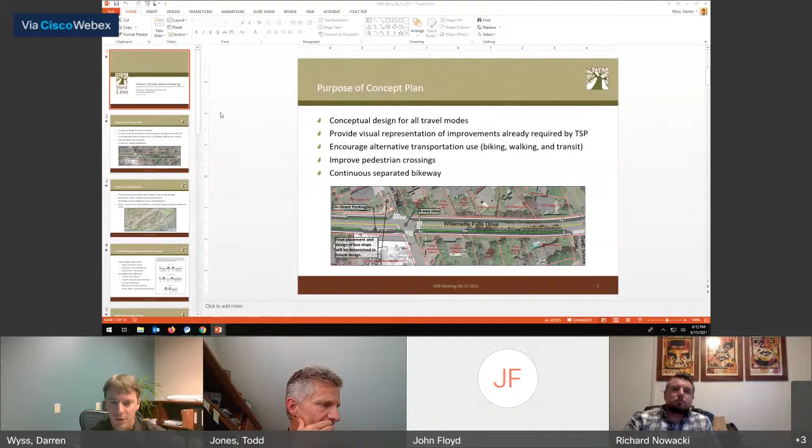Improvements through redevelopment have always been required through the transportation system plan, so if someone were to redevelop a property, the city would require these improvements. But it was always very tenuous exactly what the improvements would look like, because there wasn't a solid plan based on all those different factors and areas. This really provides a good visual representation of what the improvements would be, so when someone comes in for redevelopment, it's known what it's going to look like. It's trying to encourage alternative transportation use along this heavily traveled corridor, encouraging biking, walking, and transit use. It's also meant to improve crossings across the street itself and across side streets, as shown in the visual of improved crossings at Osman Road. The goal is to provide a continuous separated bikeway, with no on-street bike lanes — all separated from the travel lanes.

So hopefully 20 years from now, you'll be able to ride a bike from Fields Bridge all the way to Lake Oswego, between the improvements on Willamette Falls Drive and the proposed improvements on Highway 43. I don't know if any of you have ever had the opportunity to ride a bike on Willamette Falls Drive right now - it's not fun. So this is a plan that I think will be well received by the community, to be able to use this corridor safely and efficiently.

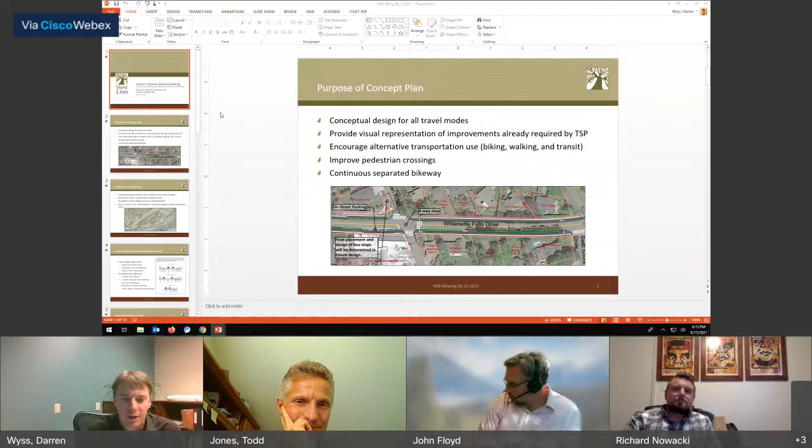Hey Darren, this is Todd. Do you want us to hold questions to the end or ask them as we go? Feel free to fire them off as you wish.

So if you got one, Mr. Vice Chair, are you okay with me asking a question? Oh yeah, please. Thank you for asking, but yeah, please go ahead.

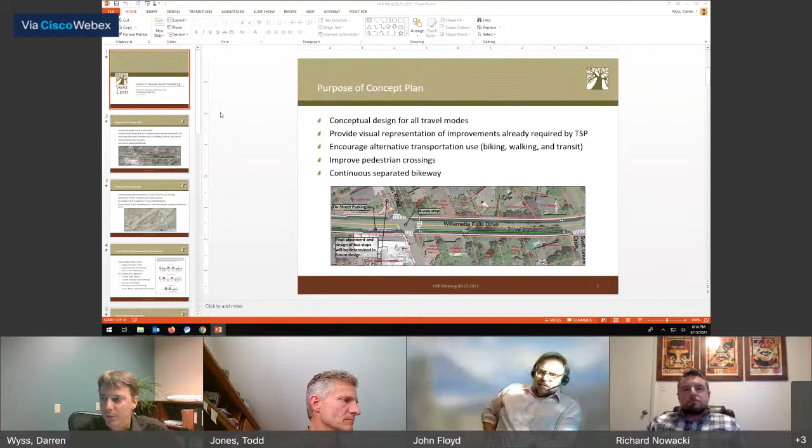Hey Darren, just to clarify, this plan stretches from the bridge across the Tualatin at Fields Bridge Park to West Bridge Park under I-205. Is that the extent of the plan, that length? That is correct. So the Highway 43 concept plan, which was adopted in 2016, basically goes from Lake Oswego city limits down to 205, and this plan goes from the Tualatin River to 205 to connect them together. I should mention that this plan will be adopted the same way the Highway 43 concept plan was - it's just an appendix to the city's West Linn transportation system plan, another document attached to the transportation system plan.

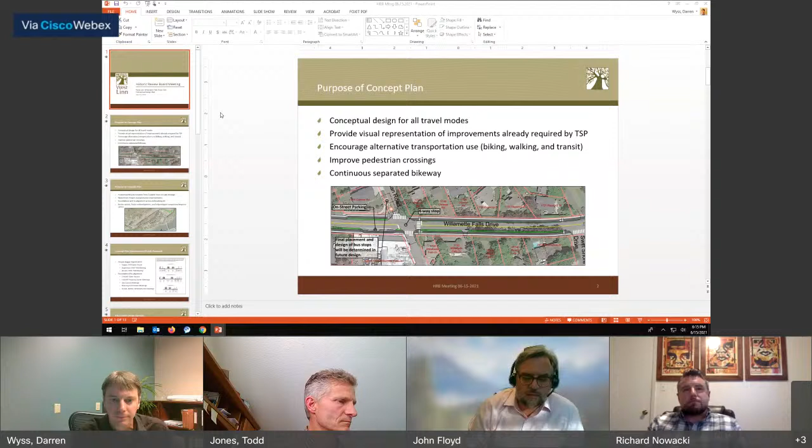So I'm sort of repeating myself here, but again, the goal is to have a complete pedestrian and bicycle network from the Tualatin River to Lake Oswego, so someone could travel the entire distance without being in the travel lane.

So during the course of the waterfront project, we discovered a 1988 plan that was done for this area. The recommendation out of that 1988 plan was to reroute the street through the mill parking lot. We explored that, and it came out as a viable option.

So you would again go through the roundabout, and then to head west toward Willamette, you would go through a new street that goes through the mill property, and then on your way to Willamette.

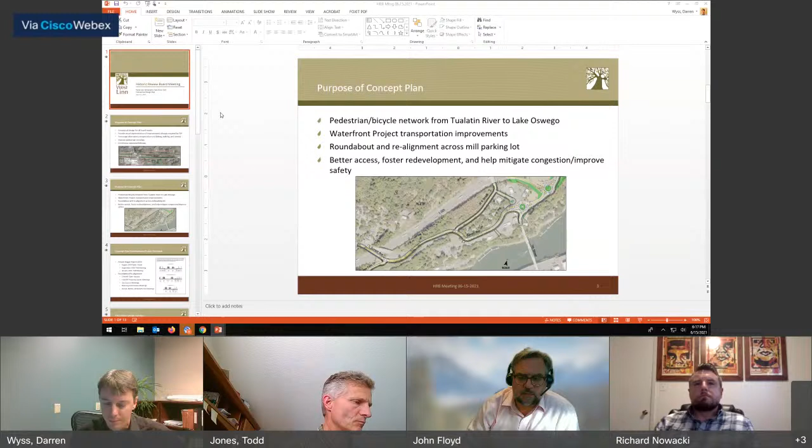Just a little background: the project began in March 2019. There was an open house in August 2019 that was really focused on the cross section of what the bike facilities and pedestrian facilities would look like. The Transportation Advisory Board was the advisory board for this project - they met in September 2020 and then again in January of this year to make final comment on it.

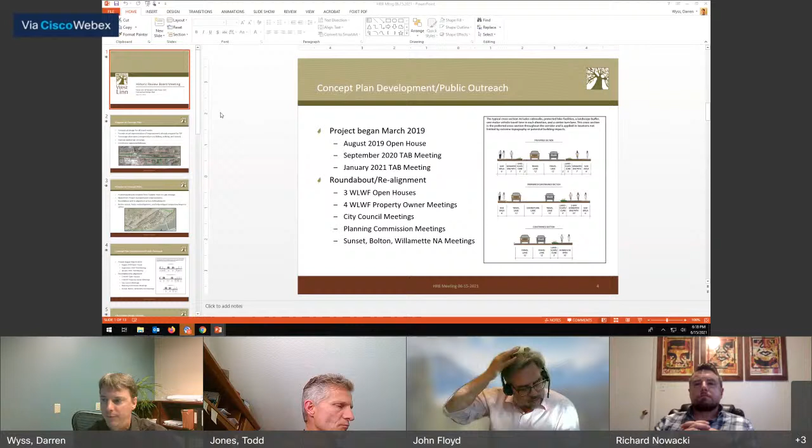As I said, the roundabout realignment was really born out of the West Linn waterfront project. There were three different open houses back in 2017, '18, and '19 where this was discussed. It started out with seven options, was narrowed down to four, and then got narrowed down to this final preferred option. We worked with the West Linn waterfront property owners, all the owners around the mill parking lot area, and held four different meetings with them to get feedback. City Council held a couple of meetings discussing this realignment, the Planning Commission has held a couple of meetings surrounding the realignment, and we also met with each of the Sunset, Bolton, and Willamette neighborhood associations regarding the realignment.

Since the corridor is so varied along the way, we really want flexibility in the design. One thing is we want to utilize the existing right of way and work with the terrain and slopes. This is considered a 30% engineered design, using topographic surveys and what we know about right of way widths, trying to design it to fit within the right of way and avoid impacting adjacent properties. Also, the city wants to be good stewards of public funds, using money to build infrastructure as opposed to buying pieces of right of way off adjacent properties.

As you can see in these two images, the green planter strip that separates the bike facility from the street is removed in that section in order to work with the slopes, so you don't impact people's properties by having to build retaining walls that would require some of their property. So it's that flexibility to moderate the design.

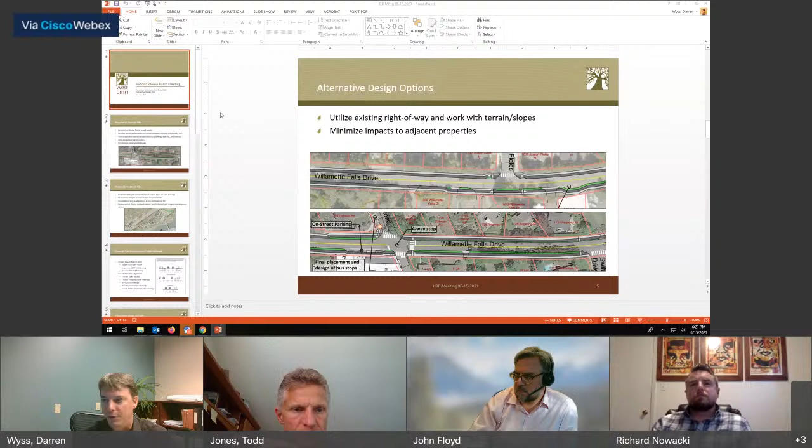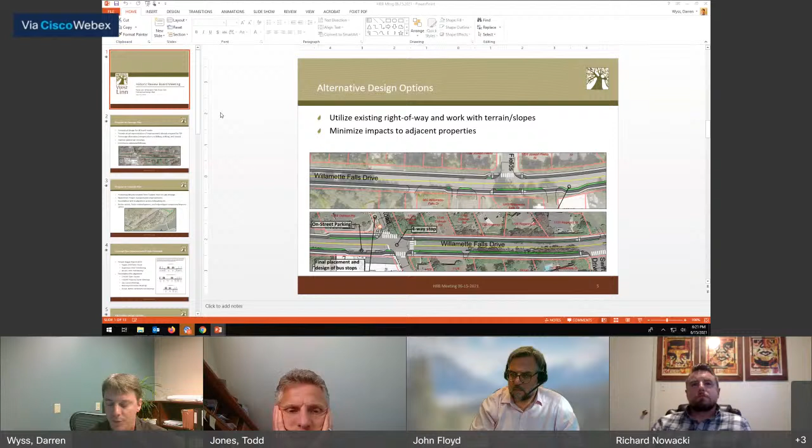On the right side of Osman, there's the full width of the planter strip on the south side of the road, but on the north side it's been shrunk a little bit just so we can fit the street cross section into the existing right of way. Once a portion of the project is funded, during final design the details would come out, and we'd work with adjacent property owners to make sure access to the property is still appropriate, dealing with any slope issues. If we did need any of their property, we would go through that negotiation process with them.

Here's another part of the plan that I think is important to point out. West of the downtown Willamette area, from Fields Bridge to the Willamette Commercial District, there would be bike and ped facilities on both sides of the street, so whether you're going west or east, you'd have bike and ped facilities on your side. Once you get through downtown Willamette, where improvements have already been made, you would be put onto what we call the frontage road.

There's a portion of Willamette Falls Drive that's separated, and the homes take access from this frontage road, so bikes and peds would be routed onto there. Once you got to the end, there's an existing pathway on the north side of the street which would still exist, with improvements made to it, and everyone would be routed to the south side onto a shared pathway.

So both bikes and peds would utilize this two-way shared path on the south side of Willamette Falls Drive, due to the constraints along the corridor there. There are cliffs that fall off toward the river, and extreme steep slopes going up to I-205 in areas, so in order to have the least amount of impact, not only on adjacent properties but also on construction cost.

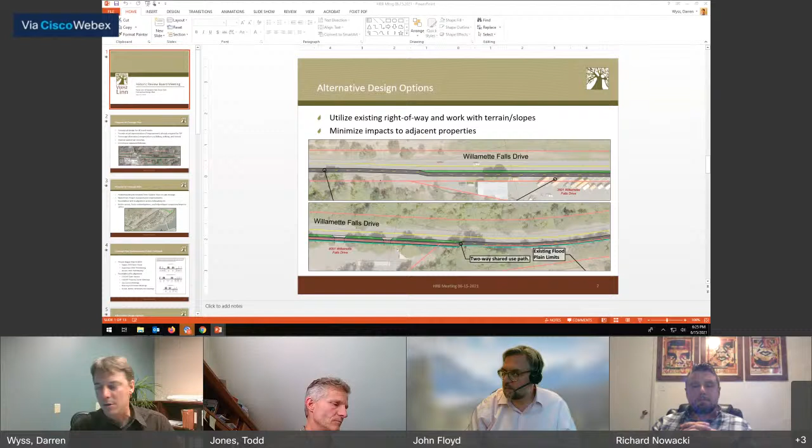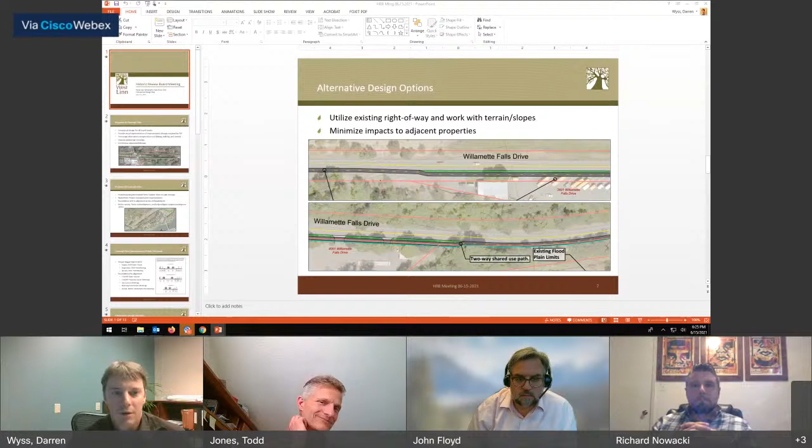So again, the shared path will be on the south side, going along the undeveloped stretch where you'll only see the old bus barn and the old composting facility. Then once it gets down towards the mill area and the PGE facilities, it will actually utilize Chestnut Street. Chestnut Street exists and comes up to the Sunset Bridge.

We utilize Chestnut Street to connect into Sunset, where there'll be a stop. Then from Sunset, it'll travel along the current Willamette Falls Drive corridor for a bit, and then drop down. There's a parking area that the mill utilized that was adjacent to Willamette Falls Drive. It will drop down through that parking area into the main parking area of the former mill owners, then go along the down slope from the existing homes that front Willamette Falls Drive, and into the roundabout. So there will also be an intersection.

So the old Willamette Falls Drive that goes across in front of those homes, we would probably rename as West A, and have it continue up past the high school. So there'd be an intersection there also.

Some of the reasoning behind utilizing Chestnut to a stop at Sunset is trying to meter traffic. When 205 backs up, a lot of people get off and use Willamette Falls Drive as what we call the third lane. So by creating stops along the way to meter out traffic, the intent is to make it just that much slower, so people don't get on their traffic app and see it's 2 minutes quicker to get off at Stafford and weave through versus just staying on 205 and getting through town.

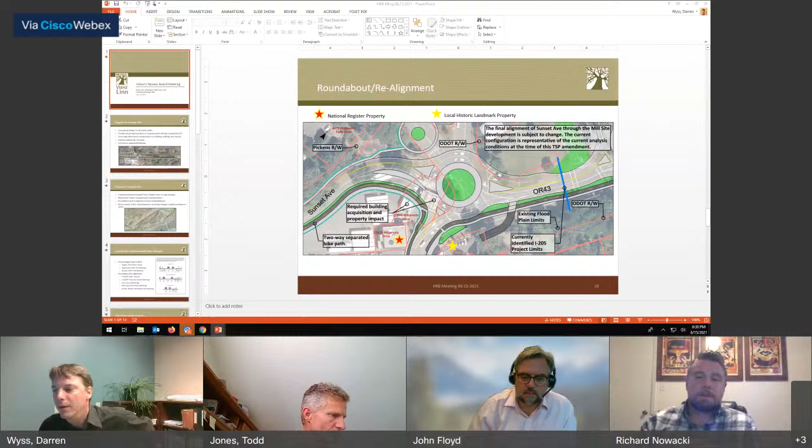That's exciting. I'm sorry, Rich, I was just commenting. That's exciting, especially the locks. There's been some comment about reopening the locks recently among various groups, and I think it's probably going to happen, which is just more opportunity for us as a community.

Yeah, so we worked with the consultant who gave the HRB a presentation a couple meetings ago about listing the historic City Hall on the National Register, and she did not believe this roundabout realignment would have any impact on the historic structure itself. So that was good news for us to hear.

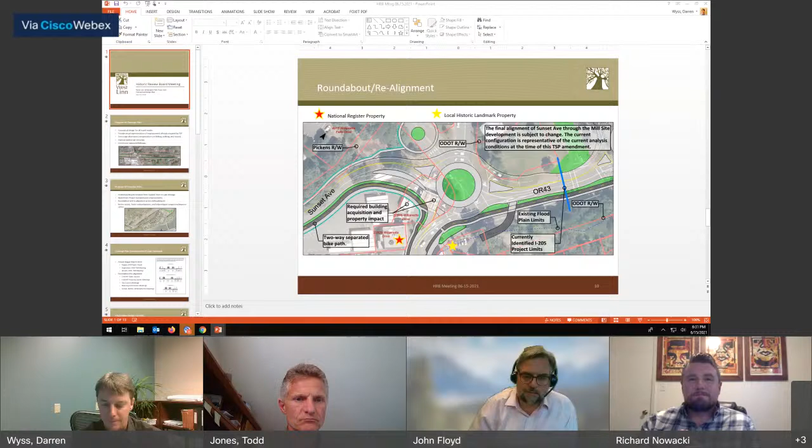So these are some other tidbits of information. The state has what's known as a Measure 56 notice. Any potentially impacted property owner, we're required to send a notice saying that we're undertaking a project that may affect the zoning or value of the property. Any property identified as potentially having an impact was sent a notice, and we additionally sent a notice to all corner property owners along the way to make sure word was getting out. We also sent a postcard to all adjacent property owners from Fields Bridge to 205, so everyone was noticed that this project was going through the adoption phase. As required by our code, it was also placed in the West Linn Tidings as a public hearing notice.

So the schedule to adopt it: the actual public hearing with the planning commission is tomorrow night. The planning commission's role is to review it and make a recommendation to city council. They held two work sessions back in April and May, so they've seen it a few times now. June 24th, the Transportation Advisory Board will hold another meeting for a final review and pass along their comments to city council. We'll have a work session with city council July 6th, and then July 12th there'll be a public hearing with city council. City council is the final decision maker on any legislative process like this, where we're adopting something into our comprehensive plan.

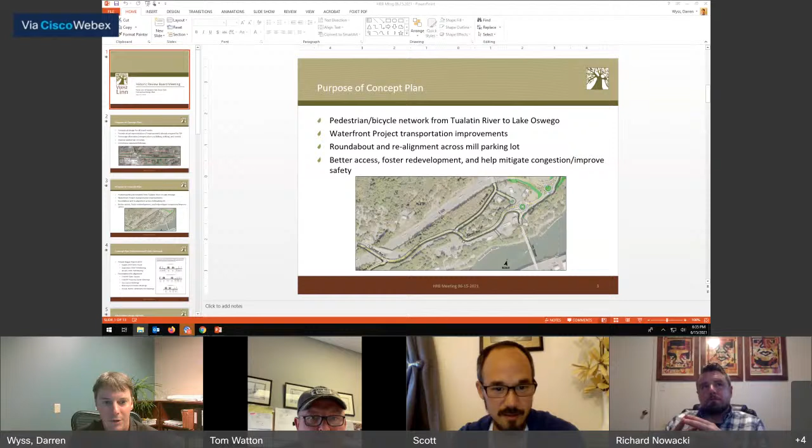Yeah, so here it is. Actually there's 3. Oh, that's right. I'm not sure if you can zoom in there at all. I don't think I can. I can open up the concept plan if you'd like me to real quick, or zoom in on your screen. You go to your zoom, you're at 100%, go to like 150 maybe so you can get a better look. Darren, that's figure 20A, if you're on page 38, you have to go there.

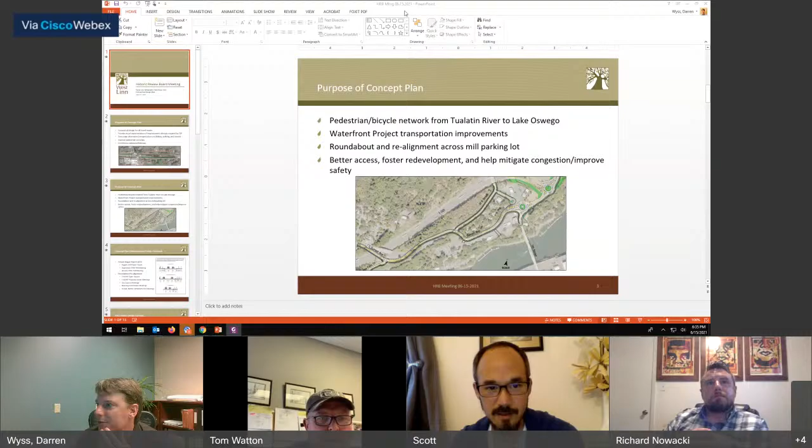All right, I'm going to stop sharing my screen and share another screen real quick here. Bear with me, I'll get there. It's worth it.

So who's the agent, who's in the bottom here as agent? Who's that? It's me, John Steele. Okay, good to hear from you, John. Luckily, I was explaining what I had to do tomorrow at 6 o'clock, and I suddenly go, 'Oh, I need to be somewhere else at 6 today.' Better late than never, yeah, I was interested in this one too.

So I apologize, give us a second, I'll share my screen again here. All right, can everybody see that now? Yeah, all right. Yeah, so this is, I guess... again, unfortunately it's not all on one sheet, so we'll have to switch to the sheets here.

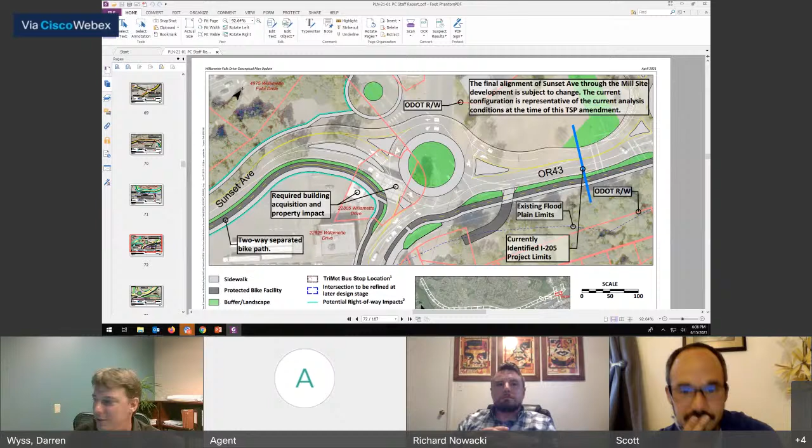This is the roundabout that would be the city's responsibility to fund and build. It's the one that, when you first come off the bridge, would essentially be located where the existing gas station is, and it would create a three-legged roundabout: one leg going west to Willamette, one going east to get on 205 or toward Lake Oswego, and then south to Oregon City across the Arch Bridge. That north leg here would not get connected to this little roundabout, just because of the slope issue.

And then the adjacent roundabout is this one here, which is part of the ODOT I-205 widening project. ODOT will reconfigure this intersection where the traffic signal currently is. When you're going north and get off at this exit, you come down to that traffic signal. They will eliminate this on-ramp, if you can see my cursor here. So when you come across the Arch Bridge, you can just get right on. That will get eliminated. You'll go through the roundabout and get on with the traffic coming from southbound 43 onto northbound 205.

So ODOT designed that, which then sort of pushed the city's hand, because we were looking at a potential traffic light here, which would have enabled us to continue this north leg and have a four-way intersection. But with the roundabout at this location, a traffic light could not be placed that close because it would back up traffic through the roundabout. There was also concern about traffic in the morning backing up across the Arch Bridge into downtown Lake Oswego or downtown Oregon City. So there are a couple of reasons why ODOT was not going to allow a traffic signal there.

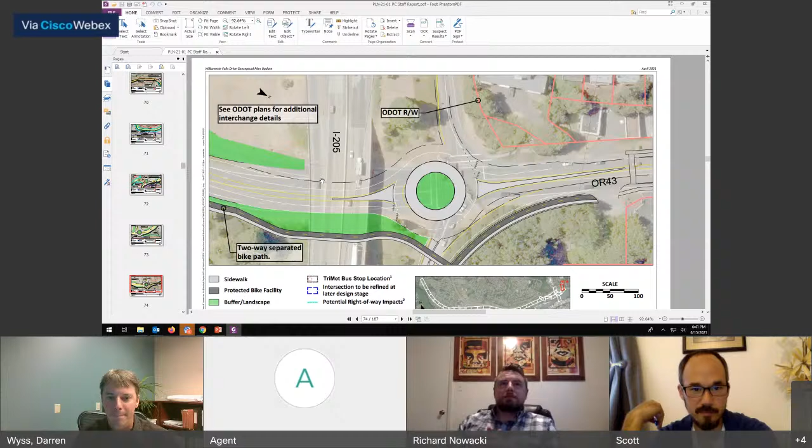We need to ease congestion, you know. Ultimately, I think that's what it comes down to. Yeah, and again, that is the ultimate goal of this roundabout here.

Especially with the growth, we're going to see a lot of positivity in this area in the next few years with everything with Grand Ronde and Blue Heron. And then what we're doing as well, coordinating, it's going to be really positive.

Yeah, so city engineer Lance Calvert talks a lot about the three-pronged approach to trying to mitigate some congestion in this area. Prong one being I-205 getting widened, so hopefully that will take some pressure off. Prong two, this roundabout, hopefully getting some free flow of traffic through there and not having that backup of people trying to make those left turns that are not protected. And three, as I talked about earlier, creating a couple of stops along the way on Willamette Falls Drive to discourage people getting off of 205 and using that to just avoid congestion on 205.

Has there been any talk about the toll situation on any of this? The toll bridge? So this has really been focused on the whole plan itself, on the pedestrian and bicycle improvements along the way. And then of course this particular solution was born out of the waterfront, so we haven't really dug too deeply into impacts on the tolling impact on the specifics of the roundabout here. But yeah, it's definitely something that needs to be part of the conversation.

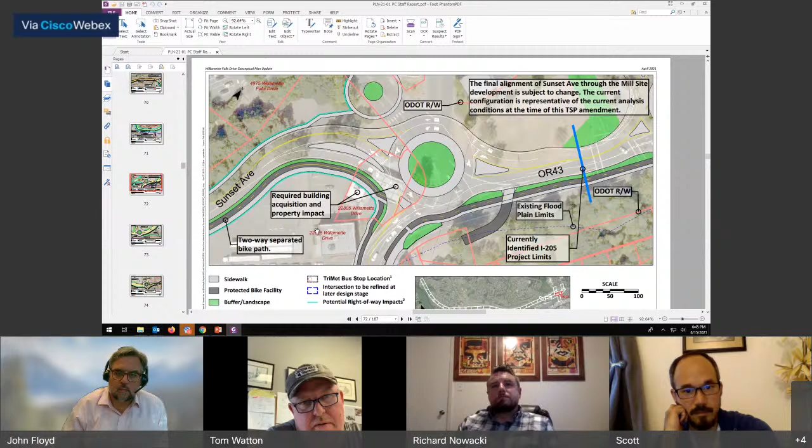So the intent, the three-pronged approach - I guess I need to take a couple steps back and talk about the sequencing of some of this stuff. First, we don't have identified funding to implement this plan right now. It's one of those things where you put together a plan like this, get it adopted into your transportation system plan, and then it becomes available for funding sources at the federal, state, and regional levels.

So our hope and first step would be to get this adopted, make it available for some funding, get it in front of them. Secondly, the I-205 project is looking more and more like it's going to get funded, and they're looking at possibly starting construction in 2022. I think they're calling it phase 1A, which would essentially be the Abernathy Bridge - they're going to split it apart, add new lanes, and build new pillars.

Then do this roundabout and the new on and off ramps, which we're thinking would take minimum 5 years, but more like 5 to 8 years. So the city, even if we were to secure funding, would not start the process of this roundabout until ODOT's roundabout would be finished. That would sort of be the sequencing.

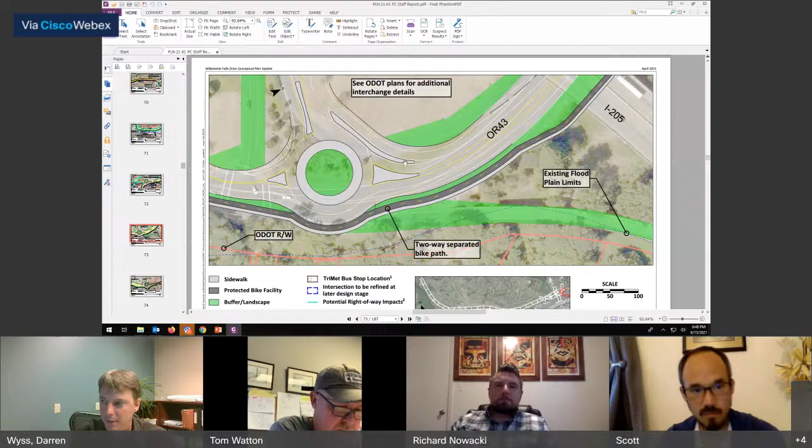Secondly, for people that do get off, eliminating this bottleneck at this intersection, creating more of a free flow through. You're all familiar with roundabouts, so it's a lot easier to merge your way into a roundabout than it is to be at a complete stop with traffic both ways, trying to make that left turn across without getting into an accident.

So that'd be the second prong, and then the third prong being the stops along the way. I believe there's a stop at Ostman that meters traffic going into the Willamette area. At some point there's probably going to be a traffic light at 10th and Willamette, so that would be another meter, or a roundabout, one of the two. And then going up Chestnut to Sunset would be another stop sign, another meter, just to slow that route down so it's not as attractive to get off of 205.

Is it just the light itself to ease the flow of traffic? It's not a meter per se, right? Yeah, just sort of a self-metering type thing with a stop sign.

So again, with technology today, you're driving down the highway and traffic starts to back up, you check your map, and it says it's 3 minutes quicker to get off here and go down Willamette Falls Drive and pop back on 205 up the way. So you create a couple stops along the way on Willamette Falls Drive, so you don't get into that position where it's quicker to hop off and use it. It's not a meter, it's more like a stop sign being used as a metering technique.

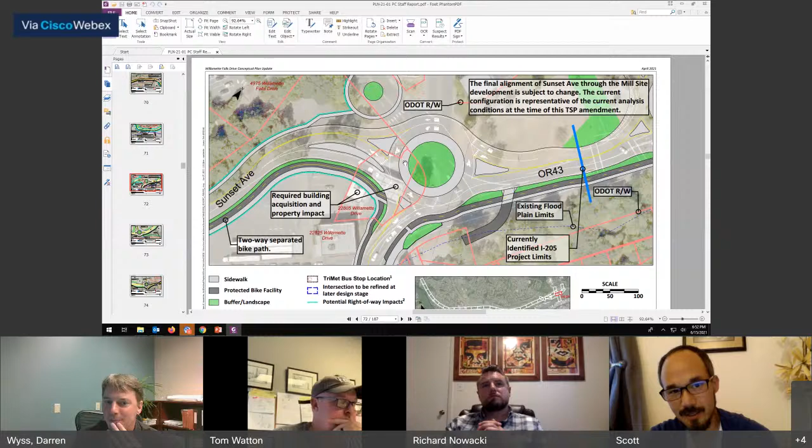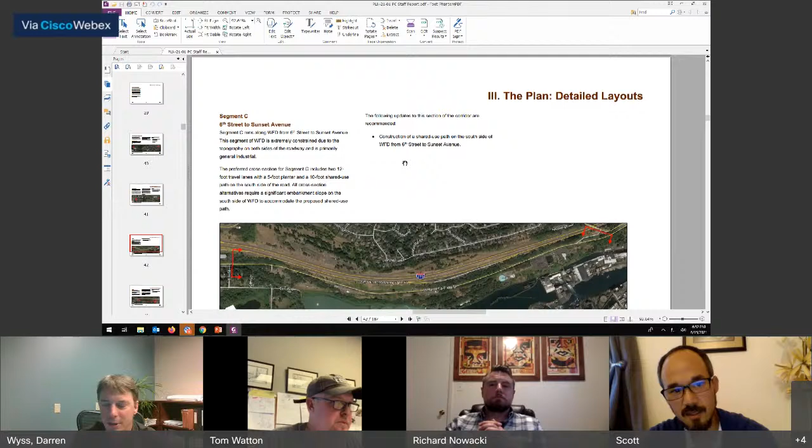Probably. Let me skip back through my document here. That's one of the questions that was asked. We presented to the Willamette Neighborhood Association last week. So this is all the way down at when you first come across the river, and there's contemplation about a roundabout there also, and that would really be in response to...

So that's the school district property on the north side, and as part of their proposal to build a middle school there, they would actually make a connection from Dollar Street down to Willamette Falls Drive right here - you can see the future Dollar Street connection. Honestly, I think it makes a lot of sense, especially in light of HB 2001 and 2003.

Just planning ahead. One of the benefits about having a roundabout here, Scott, for your question would be it would really force a reduction in speed, as opposed to just a free flow going from 45 across the bridge into West Linn, which I believe drops to 25 there, if I remember correctly.

35. As far as the people who jump off 205, they're all like, I'm gonna save some time on my commute and drive unreasonably fast on Borland Road.

I was just curious if we had the speed limit reduced on Borland Road by like 10 miles an hour or something, then everyone would know. They'd be like, oh, they slowed down Borland Road. It's still fast enough for the locals, but might tell commuters it's not the quick bypass it used to be.